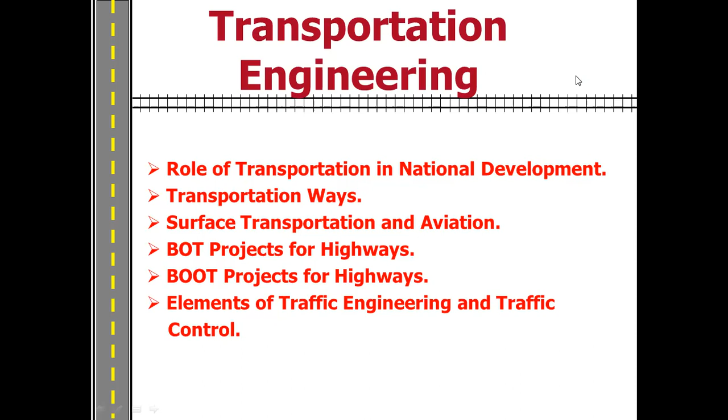So what is transportation engineering? Transportation engineering is the application of the principles of engineering, planning, analysis, and design to the disciplines comprising transportation: its vehicles, its physical infrastructure, safety in travel, environmental impacts, and energy uses.

Now, it's a descriptive definition. Transportation is all about changing the location, moving from one place to another. This is the theoretical, descriptive definition.

So when you explain this in terms of engineering, the definition comes out like this: transportation engineering is the application of the principles of engineering in which the planning, design, and analysis of various transportation systems, such as its vehicle, physical infrastructure, travel safety, and environmental impacts, including energy uses, are considered. This is a descriptive definition. You can use it in your theory examination.

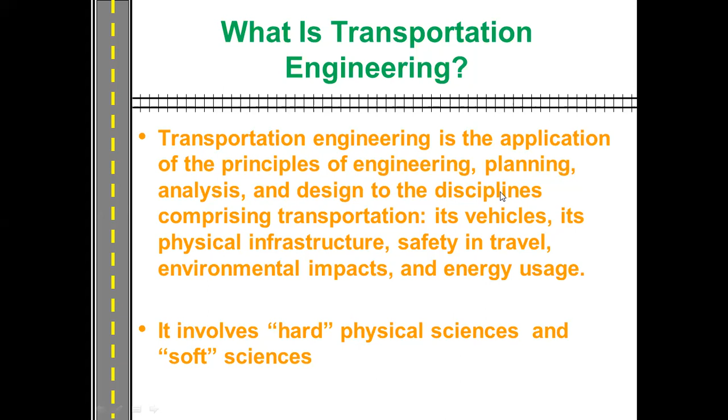Now, what is the role of transportation in national development? It is responsible for economic growth, place utility, and time utility of goods.

If your transportation is adequate, then you can go for mass production, and exploitation of natural resources. You can have various ores and minerals and transport and export all these things. All this economic development will lead to urbanization and industrial development.

Whatever agri products or goods you cultivate, modify, produce, or manufacture, you can export to other places where they are required, even to other countries. By this you can minimize the cost of production of all these goods, and you can earn good revenue out of this.

Now when it comes to national aspects, the defense and strategic needs are considered. You construct roads near the borders and strategic locations. Then air force stations, airstrips, and airbases are constructed near the borders at strategic locations. This is important as it comes under national security.

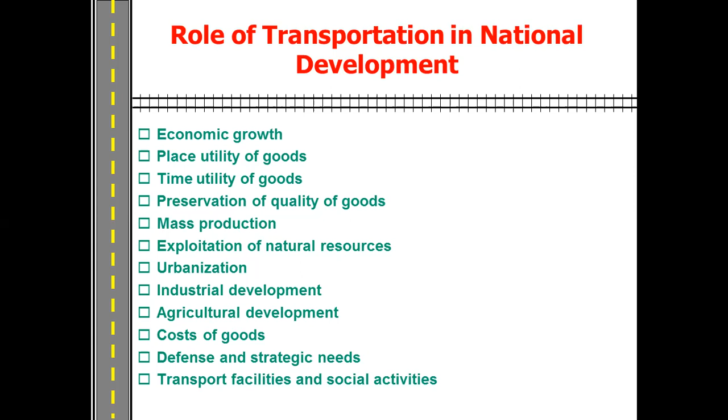Various states can be connected to each other by this type of national infrastructure projects, and social harmony can be achieved, social development can be achieved throughout the nation. So these are the various roles of transportation engineering in nation building, in nation development.

Then what are the various ways of transportation? Already we have discussed these things. Railways are there, which can be surface, can go through the tunnel as well as underground, or can be elevated such as the monorail, and LRT, that is light rail transit. This LRT you can see in Malaysia and Singapore; these countries are using LRT.

In India, we are using the MMTS also, that is the multimodal transit system, again one segment under the Indian Railways. Such as you have the DEMU, that is diesel electric multiple unit, like the local trains, advanced local trains. So these are the various segments under railways.

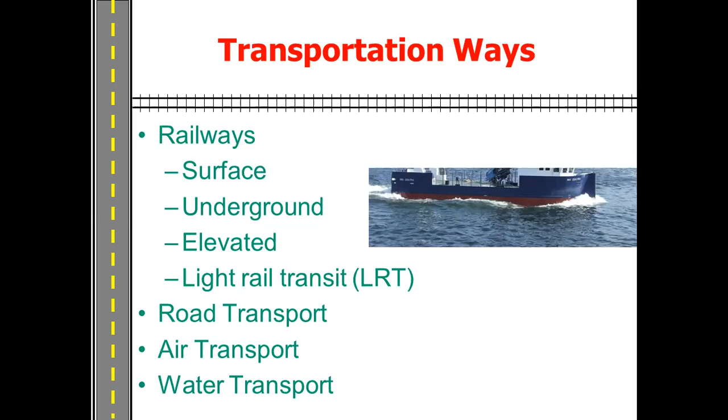Then the classification of roads. NH is the short form of national highway. Then SH, state highway; MDR, major district road; ODR, other district road; and VR stands for village road. Based on the carriageway - what is the carriageway? Carriageway is nothing but the pathway or the path followed by the road.

So in that, there's a paved road and an unpaved road. Your VR comes under the unpaved roads. And paved road again has two subcategories: bituminous road and concrete road. So the bituminous road will be made up of bitumen, and the concrete road will be made up of concrete.

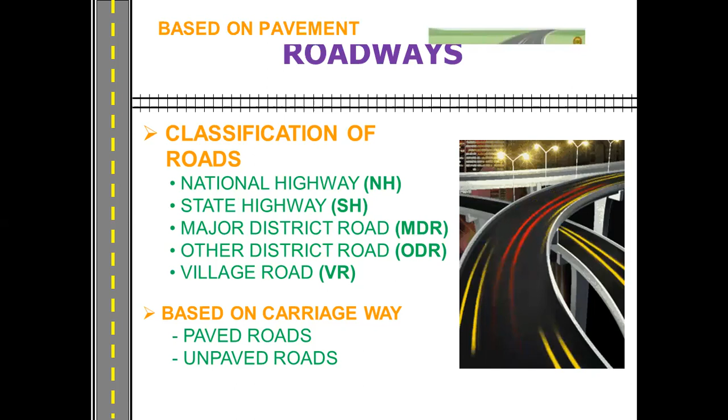Then surface road, unsurface road, already discussed. As per the usability, you have the all-weather road and fair weather road. All-weather roads do not get affected in the rainy season, while fair weather roads get affected due to the rains, or in monsoon season you are not able to use that road.

Then urban road, you are having various subcategories: arterial, subarterial, collector street, local street. These are the city roads that come under the urban areas, that is the cities. So these are the categories: arterial, subarterial, collector, local street.

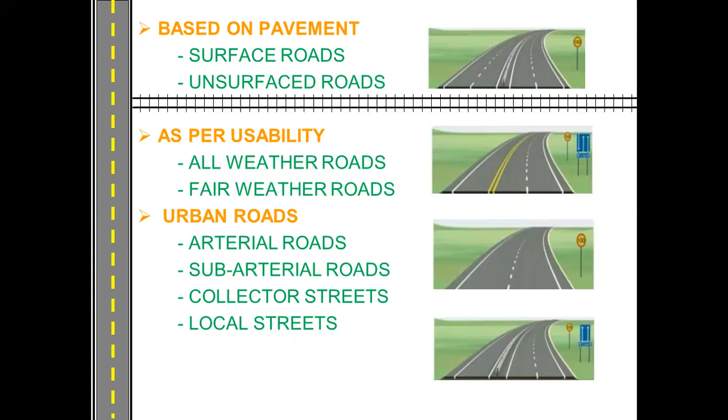Collector streets which collect the traffic. Arterial, the major roads in the urban areas, cities. Subarterial, which supports the major traffic carrying roads. And then local streets are the streets through the markets, which have less width.

Now the cross section of the roads is very much important, and various elements related to its alignment, and those elements we call the geometric elements of the road. Now, which are the things that come under the geometric elements?

Already we have seen the carriageway. Carriageway is nothing but a pathway, and that pathway will have a particular width, which we call the carriageway width. Then camber is there, that is nothing but the cross slope, the slope on the sideways. We call it the cross slope or camber in the technical language.

Then shoulder, that is the outer wings or outer sides of your carriageway. Then kerb, a slightly inclined portion which is uplifted, that is the kerb. Then width of the roadway, the exact width of your road.

Then right of way. Right of way means the eligible width of your carriageway. If certain extensions can be done, then that will come under the right of way, along the right of way.

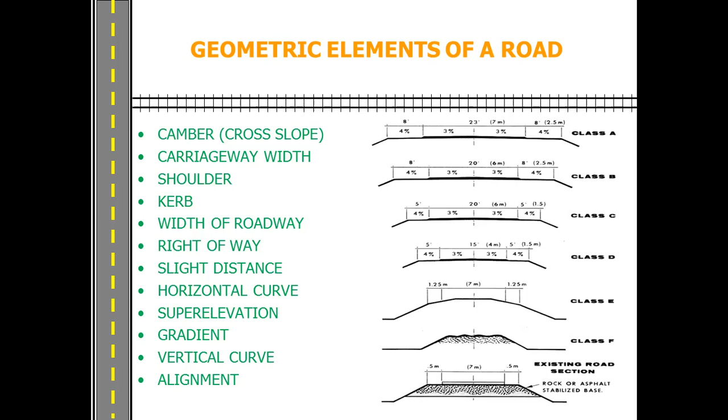Now, after that, advantages of the roadways and disadvantages of the roadways. So you all are well versed with this type of basic things, but still we will see what are the basic terms used here for the advantages and disadvantages of the roadways.

So roadways give us the flexibility. It permits any type of vehicle, smaller vehicle, larger vehicle, so the vehicle size is not fixed. So this is again an advantage. Even a two-wheeler can move, even a four-wheeler can move.

It provides door-to-door service, right? You can go through any extent by using these roads on the surface. It saves time for short distances, and the construction and infrastructure maintenance cost is also low for this.

What are the disadvantages? There are very little disadvantages for this. Goods carrying capacity is low as compared to the railways. Then speed is low compared to air, water, and rails. Less comfort because of potholes and all these things.

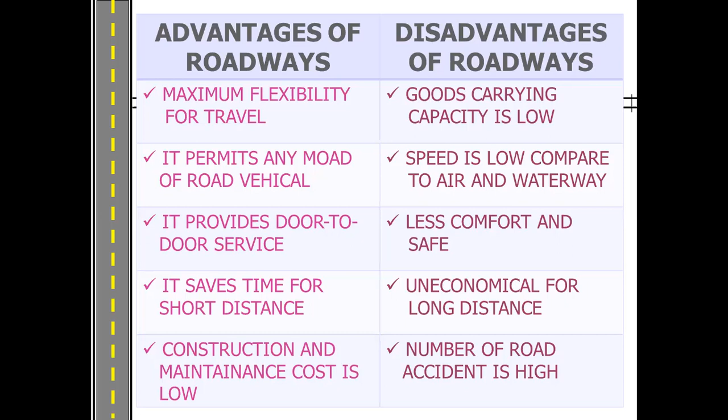You need to do the maintenance regularly. It is uneconomical for long distance. If long journeys are there, then you prefer the railways or flights. Number of road accidents are very much high because the two vehicles may collide with each other. So these are certain instances which can occur on a larger extent on the roadways. So this is again the disadvantage.

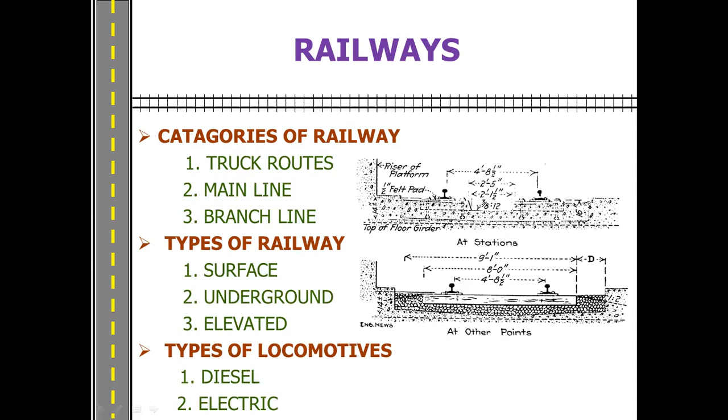Now the next thing is railways. So what are the categories? Trunk routes are there, main lines, branch lines, surface, underground, elevated, diesel is there, electric is there. And again, inventions are going on in this to use solar power or battery power. So this type of innovation is going on.

We all know the three gauges: broad gauge, meter gauge, and narrow gauge. Narrow gauge is the smallest, having a width of 0.762 meters. These types of questions can be asked in multiple choice exams. Meter gauge has exact width of 1 meter, and broad gauge has 1.676 meters. So for narrow gauge it is 0.76, and for broad gauge it is 1.67.

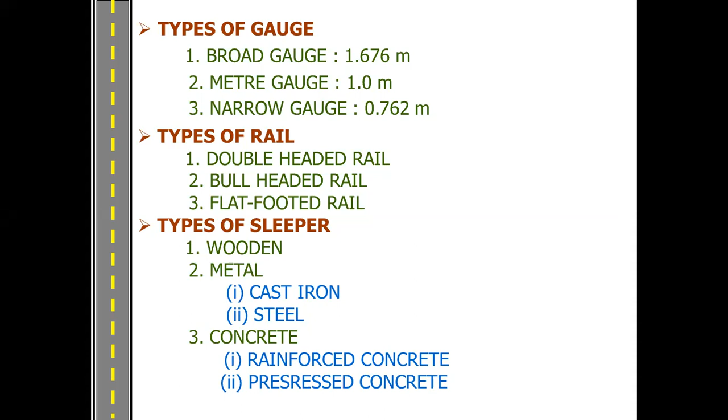Wooden sleepers were used in old times, then replaced with metals, and again replaced with concrete. In concrete, you have pre-stressed concrete as well as reinforced concrete. Mostly pre-stressed concrete sleepers are used nowadays, along with continuous or modified rails, instead of rails with joints.

Now what are the advantages and disadvantages of railways? The goods carrying capacity is high, speed is also high, because recently there are bullet trains which cross 400 or 500 kmph. So the speed is high, though low compared to airways, but still enough. It is cheaper than airways, comfortable for long distance travel, and it increases business, trade, and commerce.

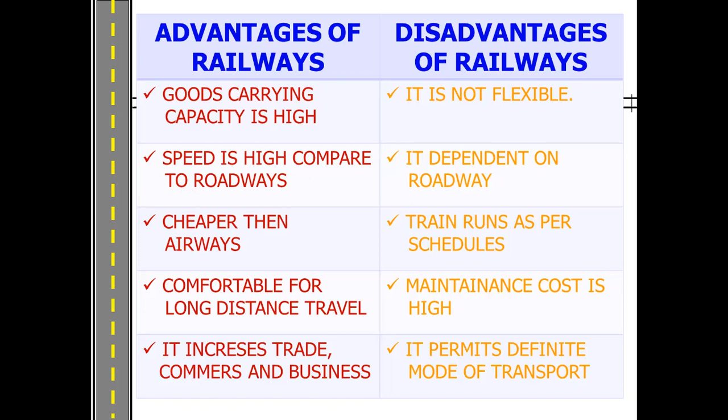What are the disadvantages? It is not flexible, meaning only a specific type of rail can move on it. It is dependent on roadways, because at the station or end point, you again need to travel by road. Trains run on specific schedules. Maintenance cost is high, and it permits only a definite mode of transportation. These are the shortcomings.

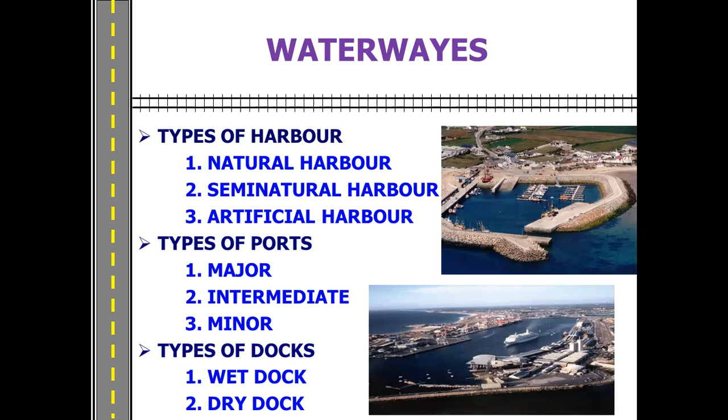What is the difference between harbor, ports, and docks? Harbor is for ships, basically for passenger ships, which can be subdivided into natural, semi-natural, and artificial (man-made). Port is for commercial transport, such as JNPT, which can be major, intermediate, and minor. For docks, you have wet dock and dry dock. A ship enters the dockyard and maintenance can be done there, such as the dockyard at Mazgaon, which is a larger dockyard. So these are the key differences between harbor, ports, and docks.

Advantages of waterways: no need for construction of a track. It requires cheap motive power because water is a softer media, so little power is needed to move. It is the cheapest mode of transportation in terms of a large amount of goods traveled using a small amount of fuel. It also provides an efficient mode of defense, and when used for defense, it helps in the growth of industries.

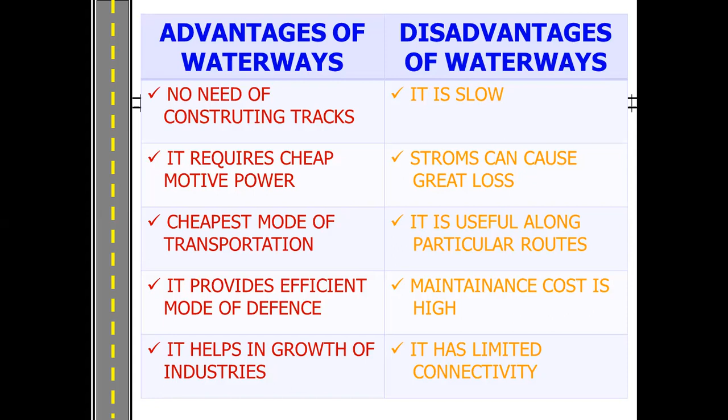Now the disadvantages: it is slow, storms can cause great loss, it is useful only along particular routes in seas and rivers, maintenance cost is very high, and it has limited connectivity.

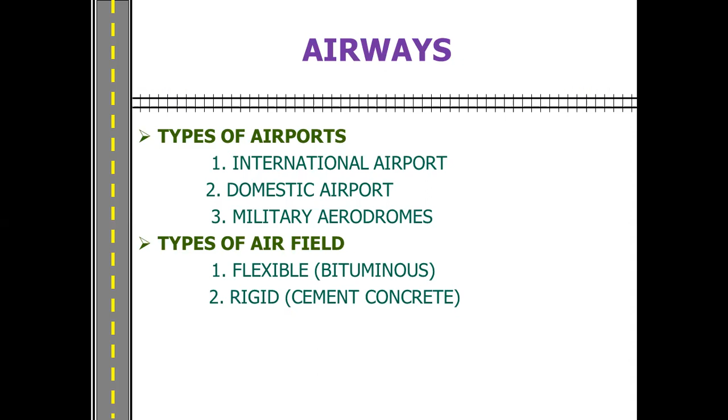Then coming to airways: airport types are international, domestic, and military, with airfield types being flexible and rigid, that is bituminous and cement concrete. We already discussed this.

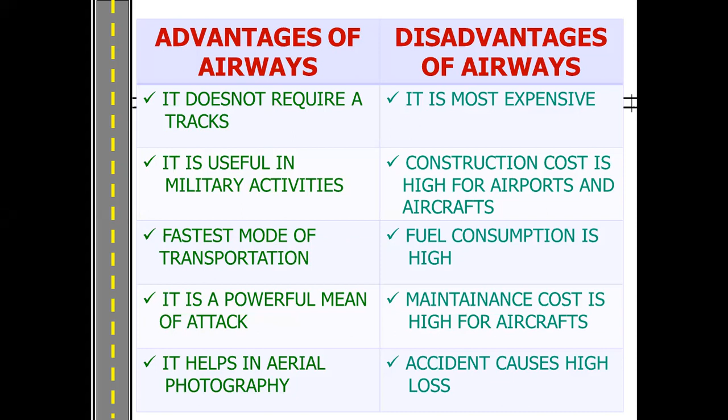It helps in aerial photography or photogrammetry, so these aircraft are very useful in military activities. Another advantage is that it is the fastest mode of transportation, with speeds of 1200 kmph, which is the highest, going up to 1500 or 1600. However, fuel consumption is high and fuel is very costly - these are the disadvantages.

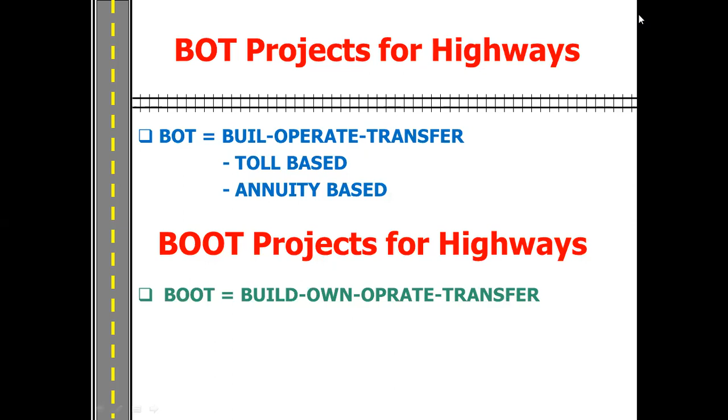I hope you got all these points. In the next lecture we will discuss what is BOT (build, operate, transfer) and BOOT (build, own, operate, transfer), and details related to highway engineering.